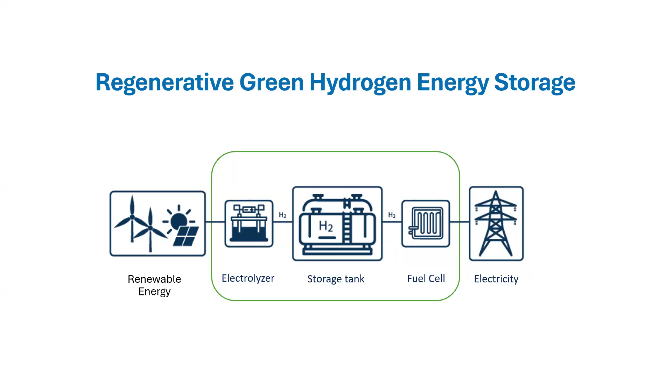So as part of my research, I looked at projects that have been pursued to date, the energy landscape, and formulated these two research objectives. I was to generate a flexible modeling tool for looking at this technology in a microgrid setting, and then use that tool to assess the potential of this storage for Arctic communities. And obviously, popular choice, I integrated my tool within PGM, which is Anthony's software.

And this is clearly too small to see what's going on. But just quickly, the code itself is in C++, uses object-oriented programming, and I added a hydrogen energy storage asset in the same place as the lithium-ion battery, so you can select it in that open source tool. And I've just published my version with the hydrogen module added to Anthony's existing code on GitHub, so you can go try it out. Still working on documentation and making it all nice and tidy like Anthony's, but it'll get there.

But yeah, what I have going on is a class for the hydrogen energy storage module, and then electrolyzer and fuel cell subclasses to model some more specific operations of those components. There's quite a lot more methods because I'm modeling a three-part system. And I've also added a thermal model to provide some insight to modelers about the waste heat and the thermal state of the hydrogen system components and potential for harnessing waste heat or sharing heat between storage assets. So yeah, happy to answer questions about that.

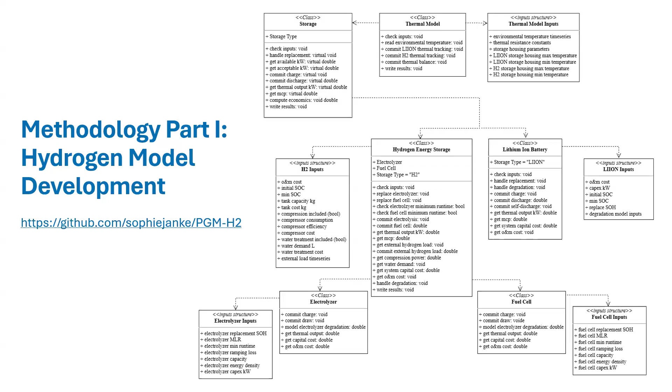But after I built this code, I then wanted to test it with real microgrid settings. So I did case studies for these three communities, but today I'm going to focus on my results, which are in my thesis, which look at Sanirajak. So that's how the technology works, but now I'll tell you guys what I found out.

So Sanirajak is a small hamlet, under 1,000 people live there, and they have renewable energy goals, and High Latitude was looking at supporting them on a system for 1 megawatt of wind, 500 kilowatts of solar, and a 900 kilowatt hour battery. And then also did a feasibility study for the potential of adding a small scale hydrogen system to look at how they could further their captivation of those renewable assets. So it's a 200 kilowatt electrolyzer, a 200 kilogram hydrogen tank, and a 100 kilowatt fuel cell.

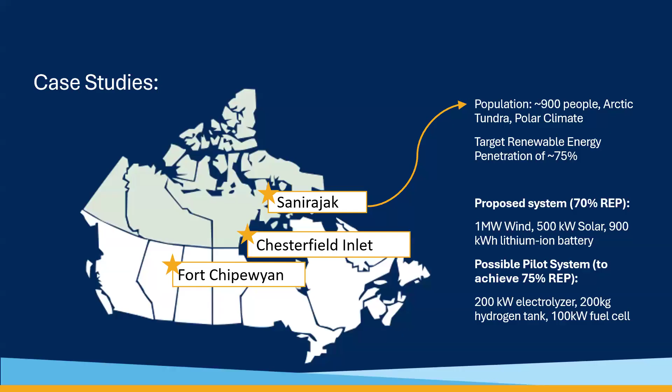So I used their community energy data. I was very lucky to have access to that and took this pilot system and ran some tests. And I'll just show a few things. This is some outputs from my thermal model. This one here is the environmental temperature data from Sanirajak, so pretty cold. And then it shows my predicted battery storage housing and hydrogen storage housing temperatures. And then I also ran this in a warm climate, just to observe the differences, since we're working in the Arctic.

And my high-level findings here were that there are perceived benefits from a thermal management perspective on hydrogen in the Arctic versus in a warm climate. Both assets are sitting more frequently on their top temperature bound, so they're running pretty hot. They need to be cooled down. In a hot place, that would be a large load, but in the Arctic, that could potentially, with added engineering, be used to heat a nearby building or heat some water up.

So that was something I observed, and I also observed quite a lot of heat sharing. So the battery didn't need to be heated as much because the hydrogen assets, whenever they're running, put off a lot of heat. So to go back, fuel cells and electrolyzers are not super efficient, and their losses go to thermal energy. So that's what's happening here.

Yeah, and then they're running pretty frequently with this small scale pilot design. And because they're running quite frequently, I found that they had a thermal resiliency, which is to say, if they were running and then they stopped, they wouldn't need to be heated until about 40 hours later. So 40 hours of energy autonomy, so to say, which is great because, as we know, there are power outages in microgrid communities.

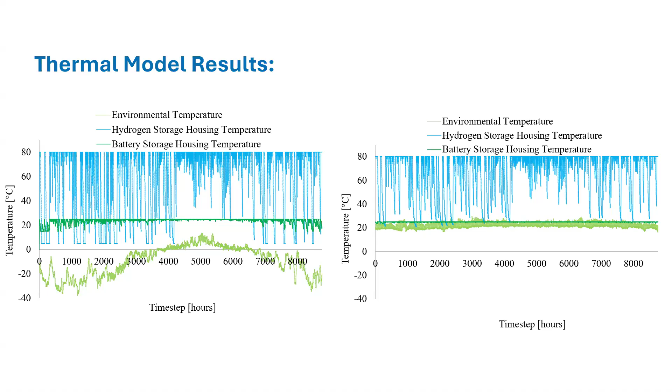I also built a degradation model for the fuel cell and electrolyzers, and that was kind of the best I could do without access to real microgrid data for these two technologies. But just to show here that for the pilot scale electrolyzer and fuel cell, there was about 3.2% loss of state of health over a year for the electrolyzers, and then 1.7 for the fuel cells.

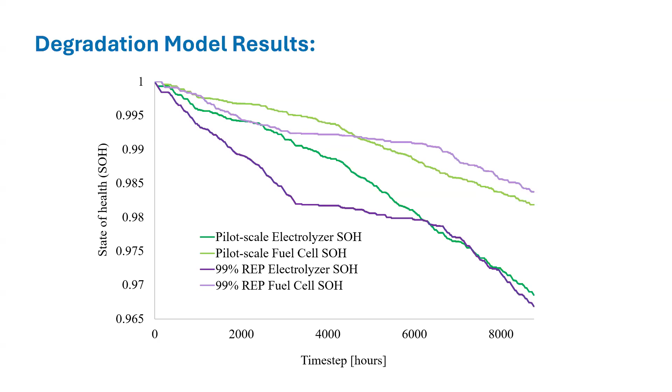And I simulated then again for a larger system. So the 99% renewable energy penetration system is like a 1,000 kilowatt electrolyzer, so a lot bigger. And it was interesting to see that for these two systems, they observed similar degradation on an annual basis for the electrolyzers and then comparing fuel cells. But we can talk more about that.

And then the second research objective is, what is the potential that my model is predicting for this technology in Sanirajak? And I looked at that question of, when does it start to make sense to consider hydrogen? If I open the search space, how can it help Sanirajak or other communities get farther? And I ran some models, actually from 60 to 100, where, with an optimization engine, I asked the model to predict the least cost system for getting to these various renewable energy penetration scenarios if it had only battery storage in the search space versus if it had batteries and hydrogen.

And what I found was that around 65%, really hard to tell, but it starts to build hydrogen. It's beneficial to have long duration storage there. And then the cost becomes a little bit more of a difference around 80%, and you'll notice that the gap kind of widens from there.

And I also performed a brief cost sensitivity analysis where I doubled the cost of the hydrogen system components, because this is a novel technology. We don't know how much the installed cost would actually be. So just to show that for those upper levels, the optimizer was still building hydrogen, even if it was very expensive, twice as expensive as my already hopefully conservative estimates were.

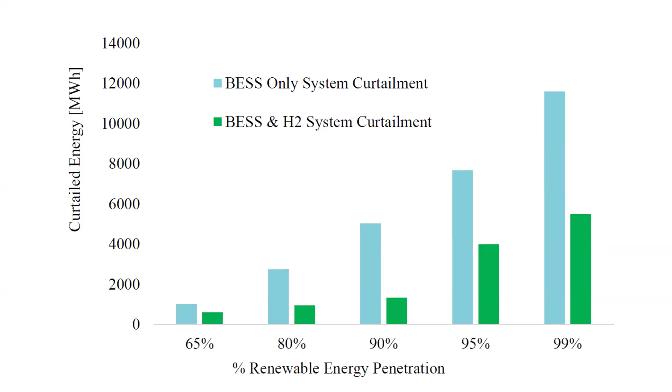And I'll go back here to give this a little bit more context: for the 99% renewable energy system with battery-only technology, where batteries are the only storage technology available, you need 4 megawatts of wind to get up there, which is so much for a small community, versus if you have access to hydrogen, the model is saying that you only need 2 megawatts of wind. So you're saving quite a lot of money by having long duration storage.

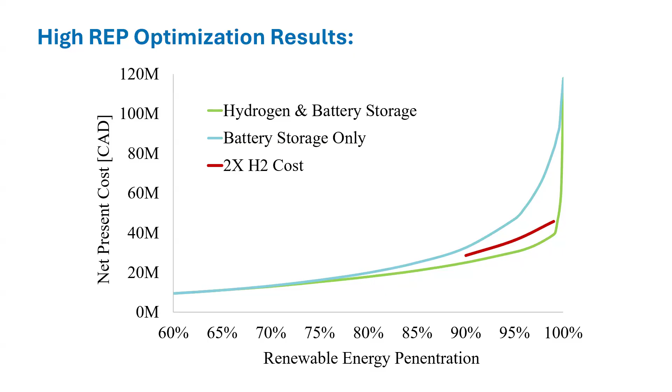And then I'm going to talk about the elephant in the room, which is that exponential spike at 100%. I wasn't super surprised by that, but I had to take a look at the time series data to understand why all of a sudden at 100%, when we remove the diesel generators from the model completely, it was reverting back to building a huge battery. So it no longer wanted to build hydrogen, which was interesting. And I experimented a little bit.

Basically, that was a function of two things. My microgrid control algorithm that I was using, which was just a simple rules-based one, which simply is: let's always deplete the battery first and use it for short duration storage, and then deplete our hydrogen asset and otherwise reserve it for longer deficits.

Basically, what was happening is that for that final 1% of energy, it was running into scenarios where there was a very small deficit and the battery is depleted, and that deficit was below the minimum load ratio that my fuel cell was allowed to run at, because I had programmed as many operational constraints as I could to try to simulate these real technologies.

So then I ran into these times when the model had such a very small deficit that was below the fuel cell's minimum capacity, and so it tipped back to building a very big battery so that it always had that very flexible battery. And then I removed the minimum load ratio constraint from the fuel cell and saw that I no longer had that exponential. And we could get to 100% with hydrogen.

So, interesting finding there, it just kind of showed me that the model is saying it is possible to get to 100% without a huge exponential spike with hydrogen and batteries if you engineer smart dispatch protocols to manage the storage assets and maybe some predictive algorithms, or we install modular fuel cells, or we get more flexible fuel cell dispatch.

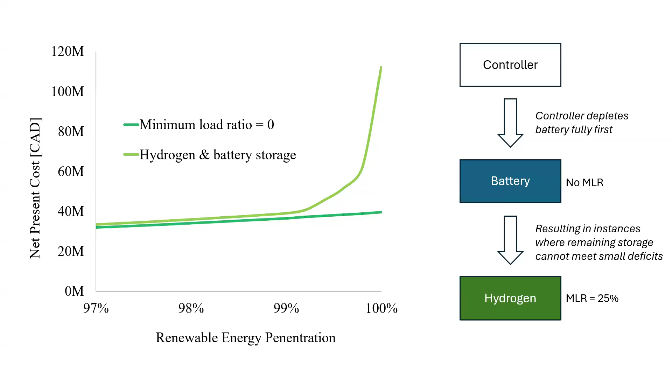I got to learn what it's actually like, which, being someone who's programming a model on my computer, is so invaluable. What it's actually like is it's freezing. It was minus 57 one day. You can't take your hands out of your pocket, but I did to take some photos.

So they worry about energy all the time. They have 2 energy operators that were very hard to track down. They were busy, and their full-time job is to keep their diesel generators running. That's the full power system. And heat is diesel delivered by truck, water is delivered by diesel truck, very diesel intensive, and they have a kind of deteriorating electrical grid that needs upgrade as well.

So lots of learnings, and most of the people we spoke to in the communities had never heard of hydrogen in the context of hydrogen energy storage. So that just led me to try to incorporate more into my model, or just to consider. I'm saying, great, hydrogen, the model says we can do it, let's do it. But that's not actually how these things work. An optimization algorithm can't tell you what's practical.

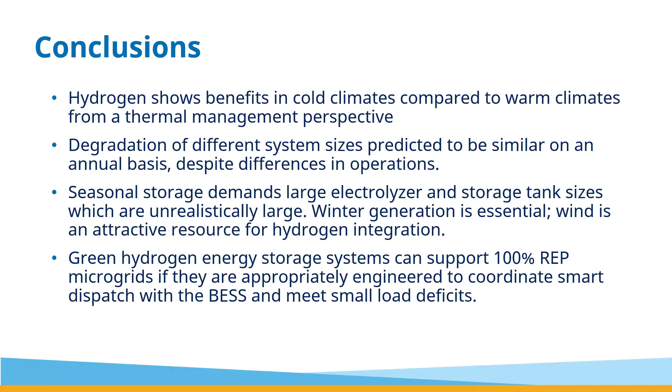And then this would be my guide: the promise of hydrogen in my work may encourage communities to explore this technology in the future if they have those high renewable energy penetration goals. Otherwise, batteries are great for supporting these Arctic systems to a certain point, and then strong winter generation and access to those enabling conditions, or thorough research into each one.